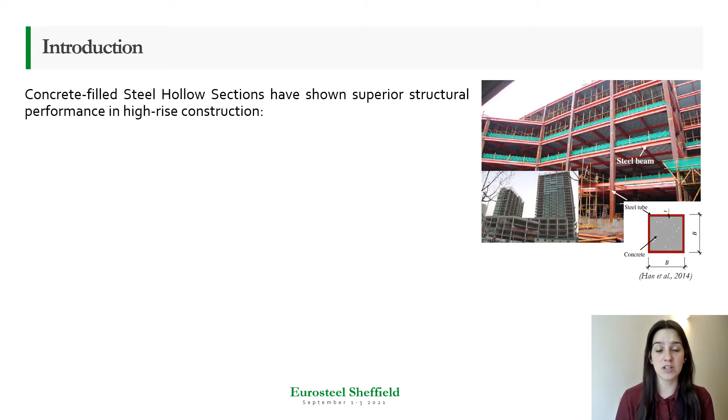Steel hollow sections with concrete infill have become popular in high-rise construction due to many structural and architectural advantages. For instance, they offer enhanced load carrying capacity, ductility, and rotation capacity. In this configuration, column walls limit concrete fracture as well as buckling, and of course they offer higher fire resistance.

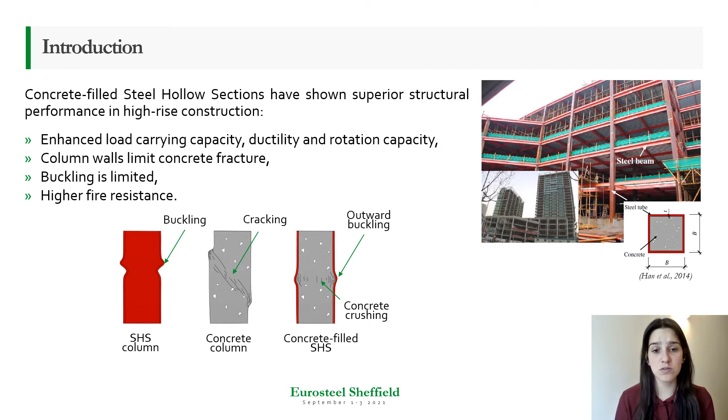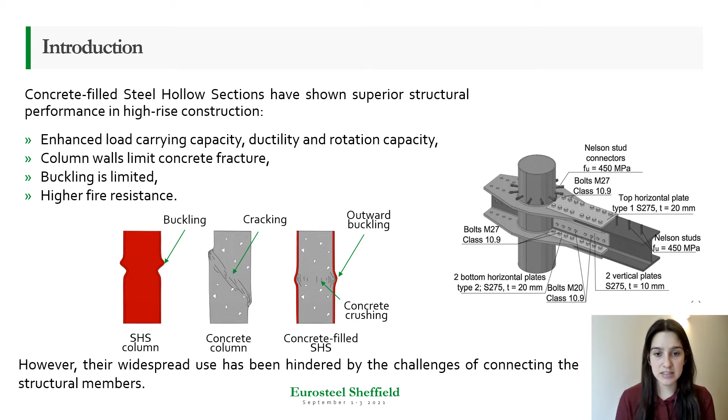So we have this powerful configuration, but we don't use it as much in construction, as connections can be overcomplicated, as in this example, because there is a lack of access to the inner part of the column to install standard bolts. This is where research at the University of Nottingham comes in, as we want to present a fastener that can be easily installed on site, and is safe and, more importantly, efficient.

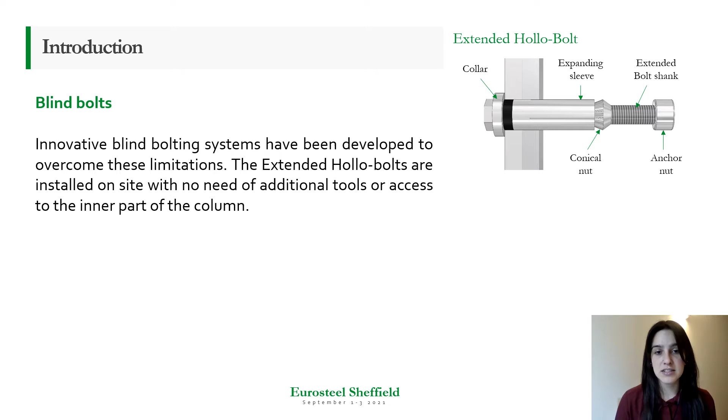Blind fasteners have been developed to overcome these limitations, so they can be installed from one side only. This is the case of the Extended Hollo-Bolt, which has a geometry that changes during installation, creating a clamping force between the connected members, and also creating an anchoring effect with the concrete surrounding the bolt.

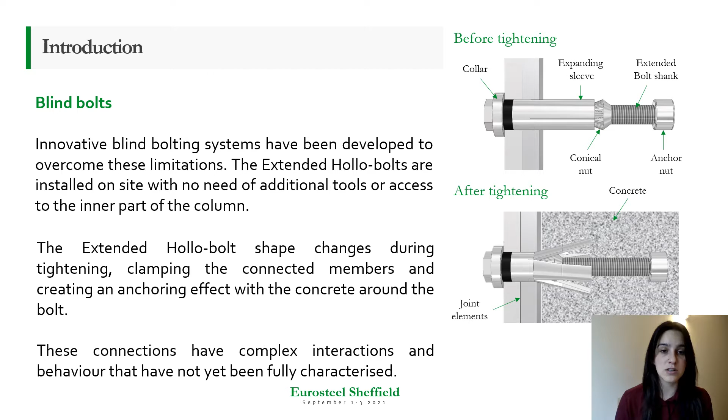However, as you can see here, there are many complex interactions in this kind of fastener, and they have not been fully understood yet. Therefore, we are working on understanding these complexities in order to produce a blind fastener that can widen the use of steel hollow sections in construction.

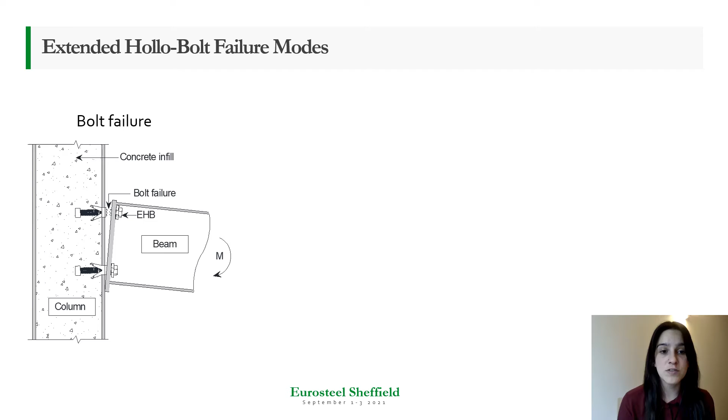Now, from the literature, we have identified three possible failure modes of the connection. First, we have the bolt fracture, usually known as strong column, weak bolt. Secondly, we have the column face fracture, opposite to the previous one, where we have a strong bolt and a weak column. Finally, a combined failure mode where all components contribute to deformability.

From the literature review, we have seen that this combined failure has not been addressed yet. Understanding this combined failure mode, which is the actual failure the connection will be subjected to in structures, will allow us to widen the use of concrete-filled sections in construction.

So in order to understand this failure mode, the first step taken has been the development of a numerical model that combines two independent validated finite element models that simulate the behavior of these two extreme cases.

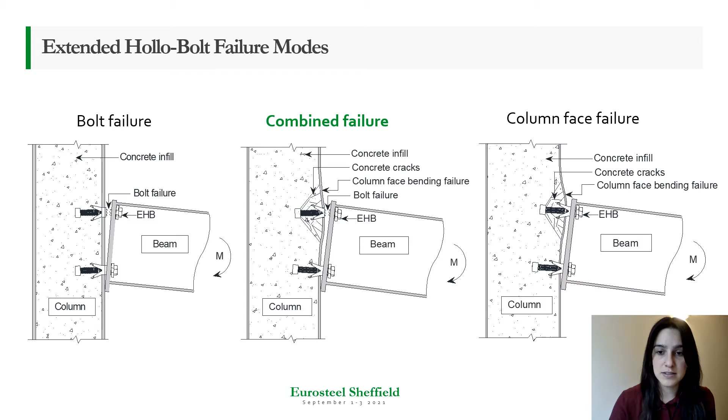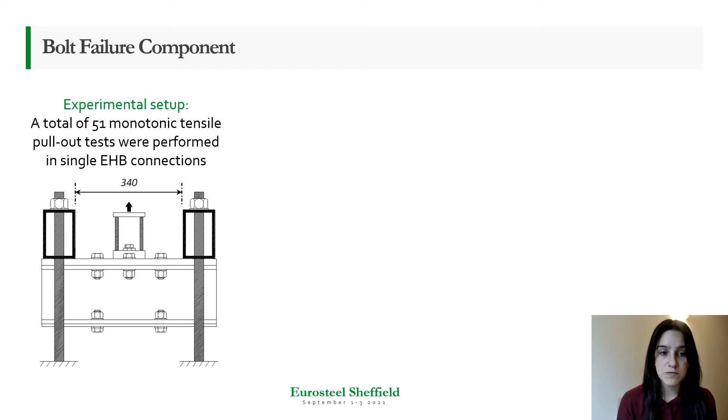So if we look at the bolt failure component, we took data available from the literature from a total of 51 monotonic tensile pull-out tests performed in single Extended Hollo-Bolt connections. In these experiments, a rigid box was used in order to limit the box failure and only study the bolt fracture.

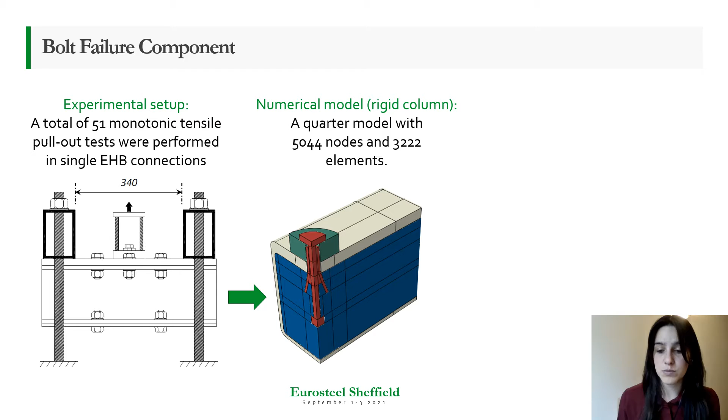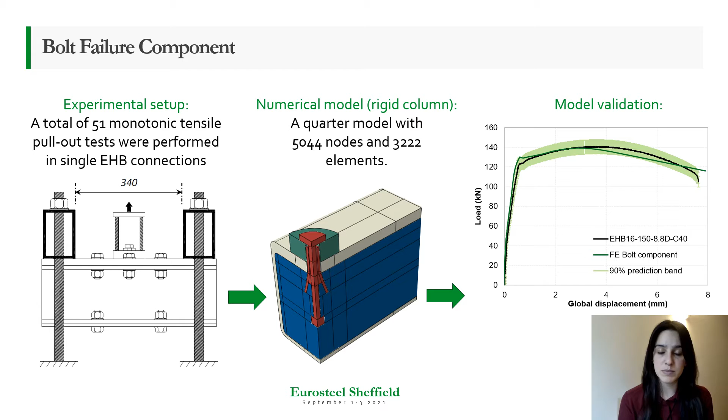Now, similarly, for the case of the column fracture, we have taken information from 35 experimental tests, in this case performing groups of extended hollow bolts.

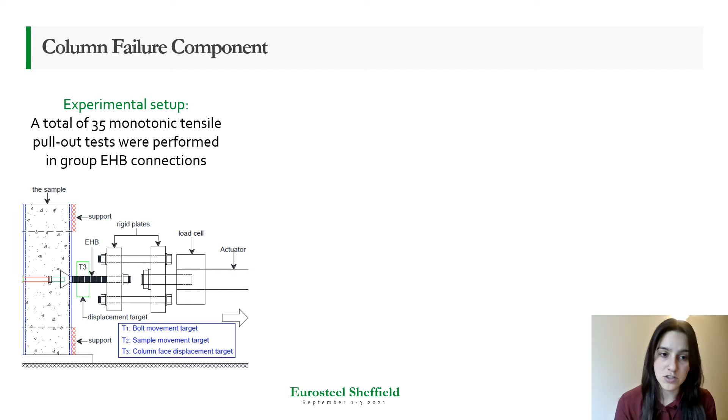For this type of experiments, the authors used a simplified geometry rigid bolt in order to limit the fracture and base the study only on the column face. We developed a model, again taking advantage of the symmetry. However, we used the exact geometry of the bolt in order to make it compatible with other finite element analysis.

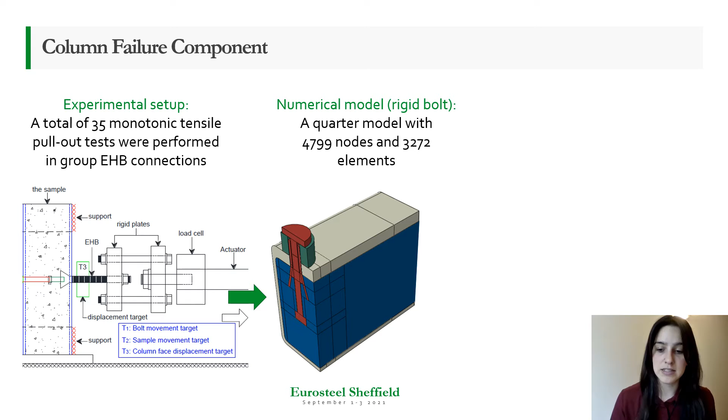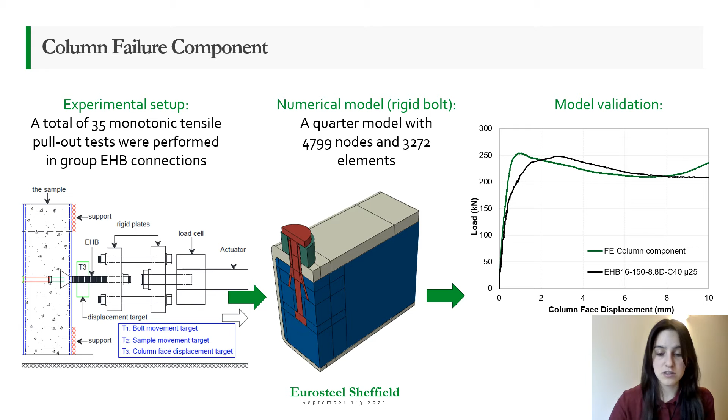But in general, we can see that the general behavior is well predicted by the model, so it is considered validated. We use the previous two finite element models that were validated to produce a combined failure model, which has the actual stress-strain relationship and elasticity properties of all components.

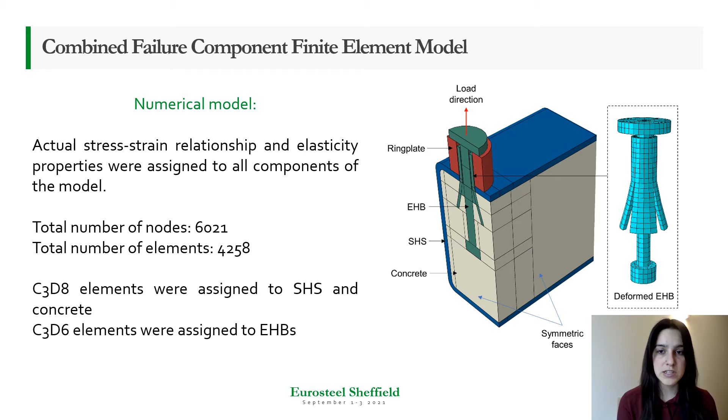In this case, we also use symmetry, assigned appropriate boundary conditions, and the load was applied as a displacement control boundary condition at the bolt head. We monitor both the bolt head displacement as well as the column face displacement.

If we further increase the load up to 64% of the plastic load, we observe strain in the column face reaches a plastic value, and there is a stress concentration in the bolt. In the region between 64% and the plastic load, we saw concentration of stresses in the sleeves as well as in the bolt shank.

When we reach the plastic load, we have reached the ultimate tensile capacity of the bolt, where it starts necking, and after this point, the component strength is only dependent on the properties of the bolt.

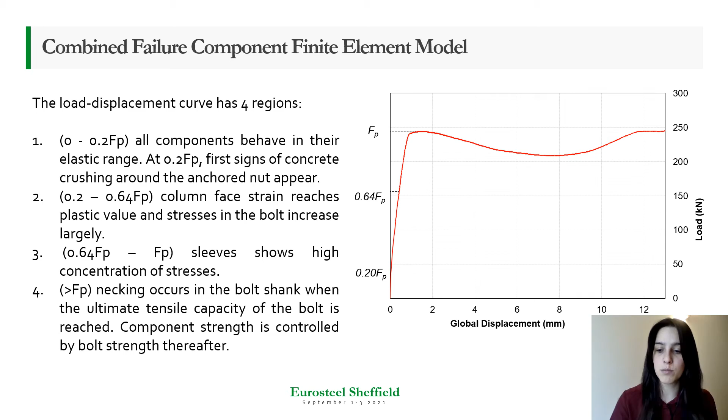This has shown us the development of failure of this component, but we also wanted to evaluate the variation of bolt grade and the effects this could have on the general behavior of the component. The results from a parametric study changing the bolt grade from 8.8 to 10.9 has shown that both the stiffness and strength of the component are increased.

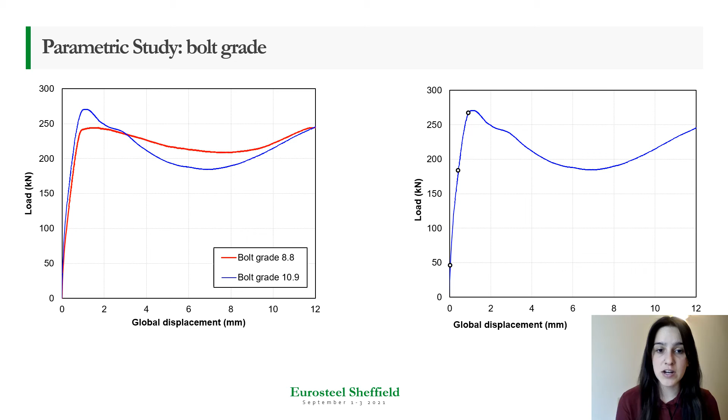If we look specifically at the graph of a bolt grade 10.9, we observe that there are also 4 regions similar to the previous model. We also observe high concentration of stresses at the beginning of the graph in the concrete, followed by concentration of strain in the column face, and finally, near the plastic load, we start seeing concentration of stresses in the bolt.

However, in this case, the bolt didn't neck, but it started slipping and pulling out of the section, meaning that a change in the bolt grade changes the mechanism of failure from bolt necking to bolt pull out.

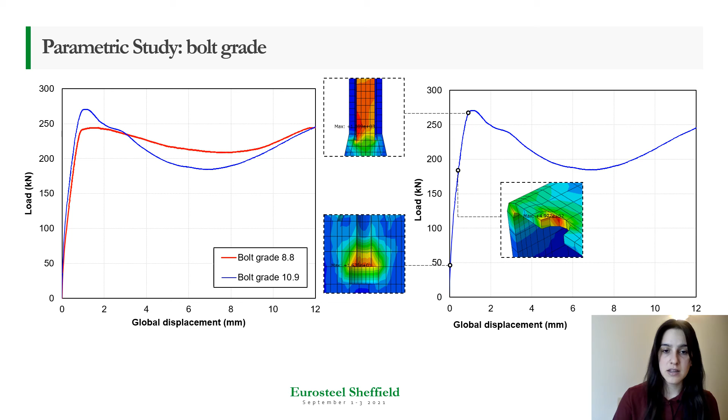Now, it is clear that changing the bolt grade has a significant effect on the component behavior, but this has only been performed in a numerical analysis. So we have proposed a test setup in order to continue studying the component behavior in an experimental way.

The test setup includes a concrete-filled steel section. We also have a T-stub, as you can see here, which simulates the beam. We have the extended hollow bolts and multiple supports to perform the test.

We also have proposed a range of parameters, including concrete strength, bolt diameter, bolt grade, slenderness ratio, which is dependent on the column thickness, bolt gauge, which is the distance between the bolts, bolt pitch, in case we want to study different rows of bolts, and finally the embedment depth, which is based on the bolt shank length.

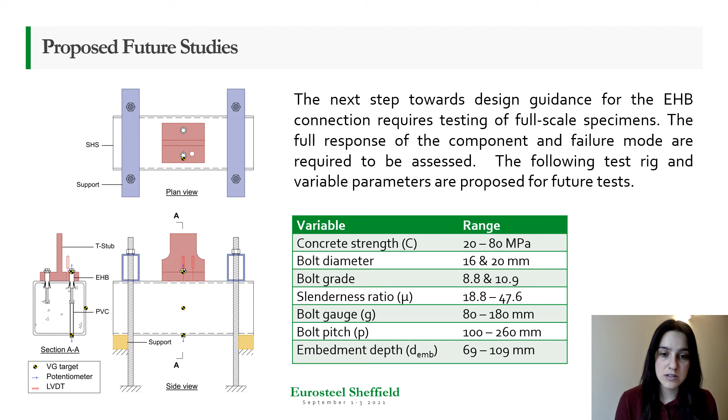Now, to conclude, we can see that this study has provided important steps towards understanding the behavior of the combined failure of the extended hollow bolt connection by presenting a validated finite element model that can predict the variation of bolt grade.

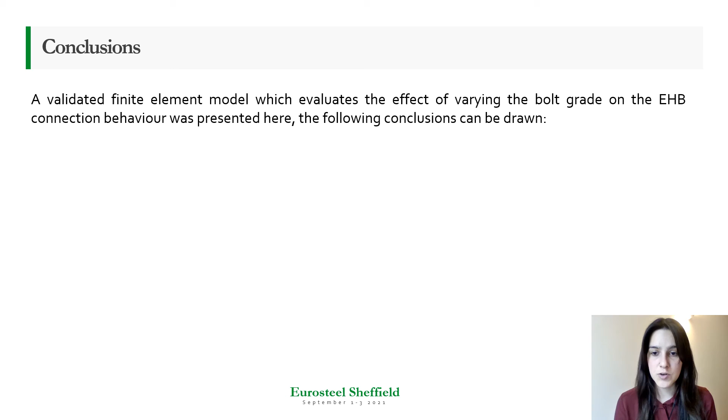More detailed conclusions include that the first failure signs for both grades studied in this particular study are caused by concrete crushing accompanied with hollow section yielding.

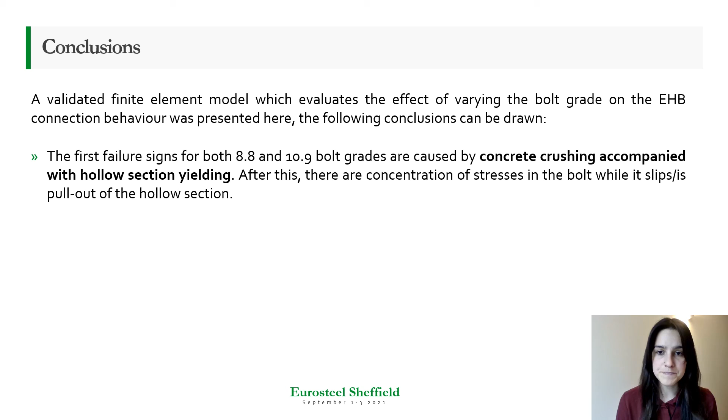After this, the concentration of stresses happens in the bolt, causing either bolt necking or bolt slippage.

The use of a higher bolt grade, in this case 10.9, increases the component strength and stiffness when other parameters are kept constant, such as bolt diameter, bolt shank, concrete strength, and column slenderness ratio.

And variating this bolt grade has changed the failure mode, again from bolt necking to slippage, which means the available analytical models for bolt grade 8.8 are not applicable for 10.9, as it is a different failure mode.

We have also concluded that further studies are required in order to fully characterize this component failure, and an experimental program has been proposed in order to continue these studies.